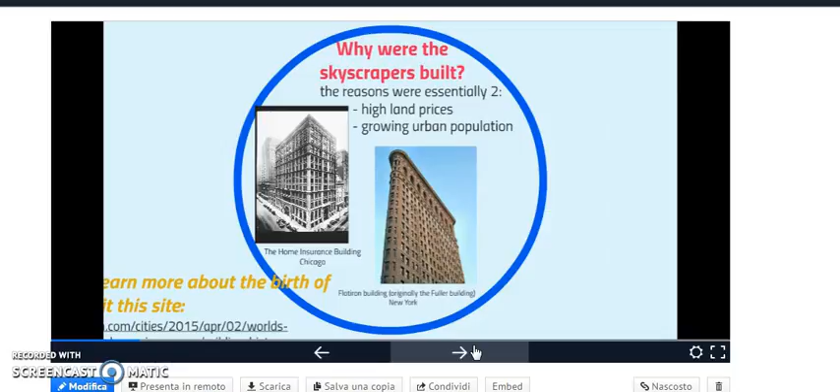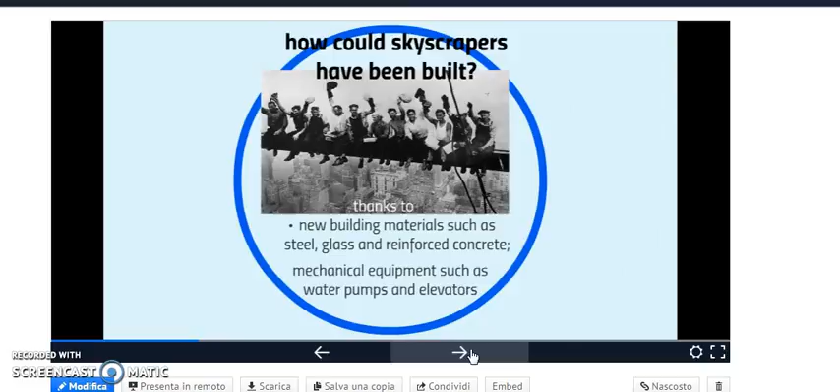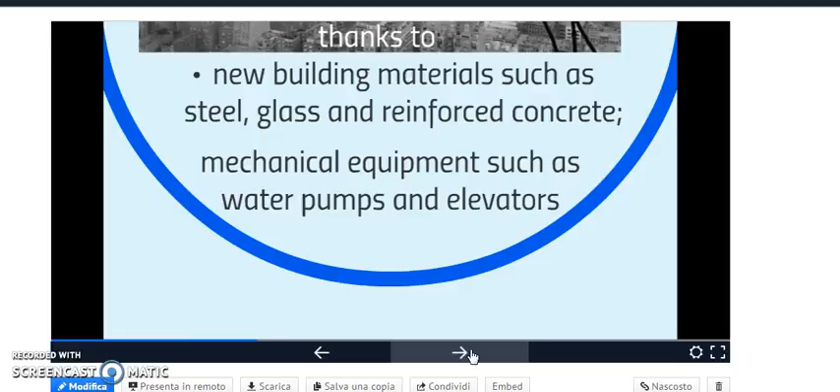Such dramatic constructions had been realized thanks to innovative technology, which involved building materials such as steel, glass, and reinforced concrete, and mechanical equipment such as water pumps and elevators.

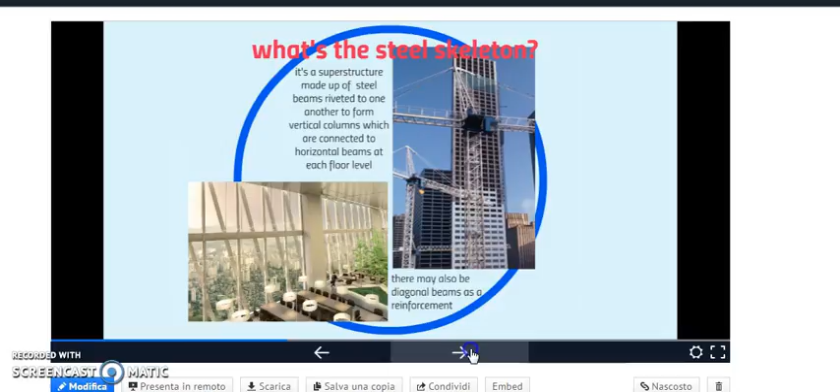Anyway, let's say something about the most important technical feature of a skyscraper, the steel skeleton. It's a superstructure made up of steel beams riveted to one another to form vertical columns, which are connected to horizontal beams at each floor level.

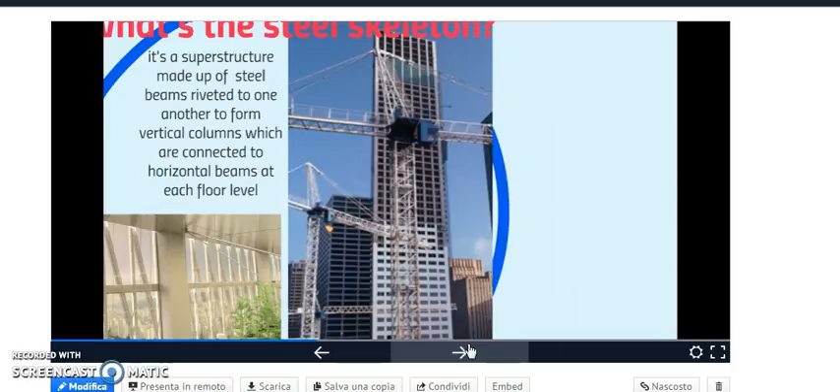The result is the construction of a kind of cage, sometimes reinforced by the use of diagonal beams. It offers the double advantage of supporting huge loads while weighing much less than traditional masonry. Let's go deeper into technical details.

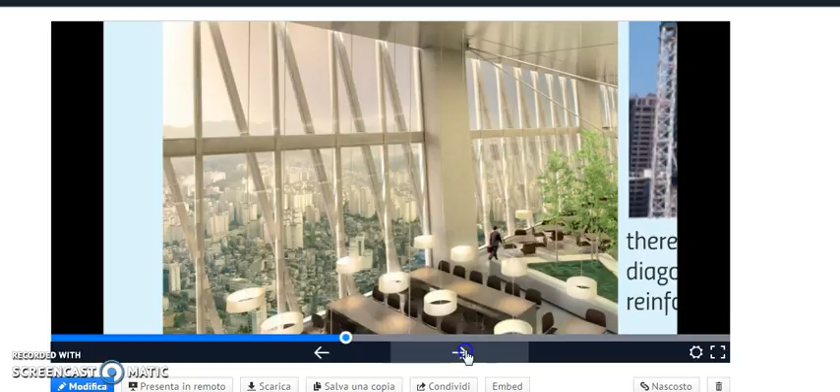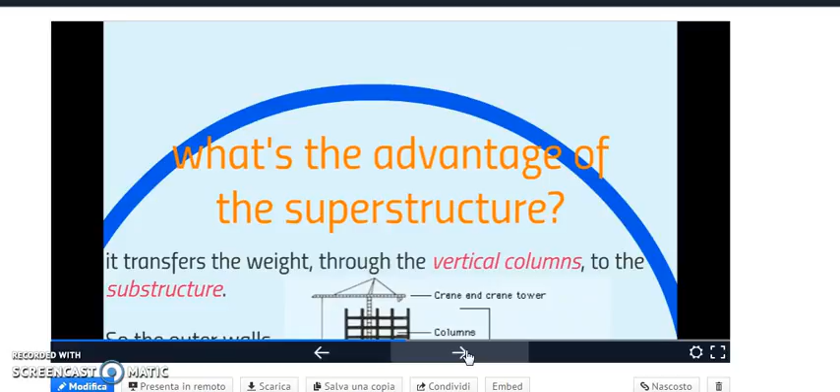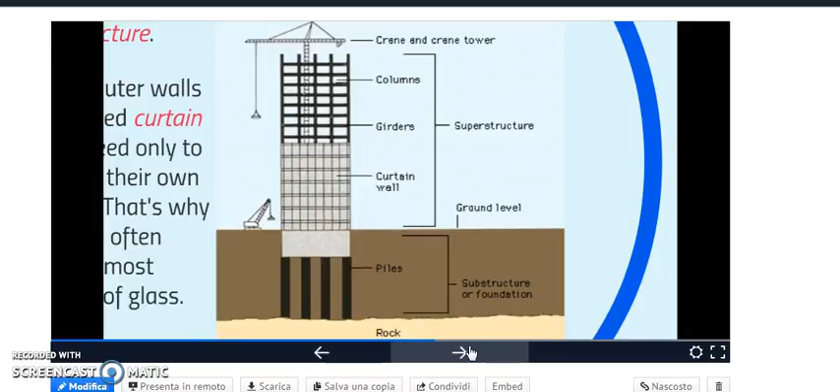What's the advantage of the superstructure? Well, the first advantage is that the weight is transferred to the vertical columns, and it's entirely supported by the substructure. This way, the external walls, also called curtain walls, need only to support their own weight, and that's why they are often made almost entirely of glass.

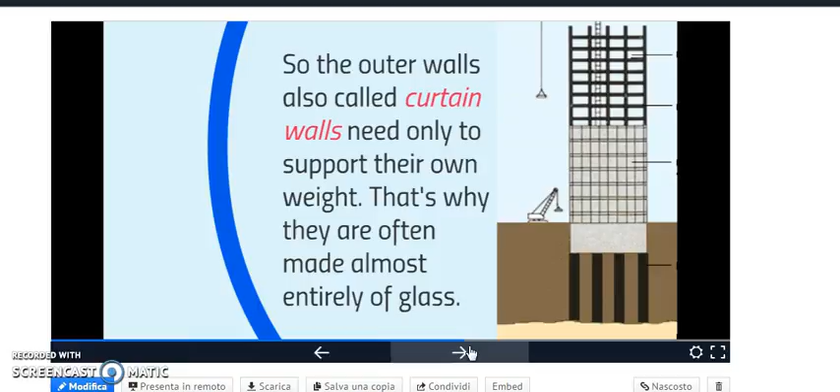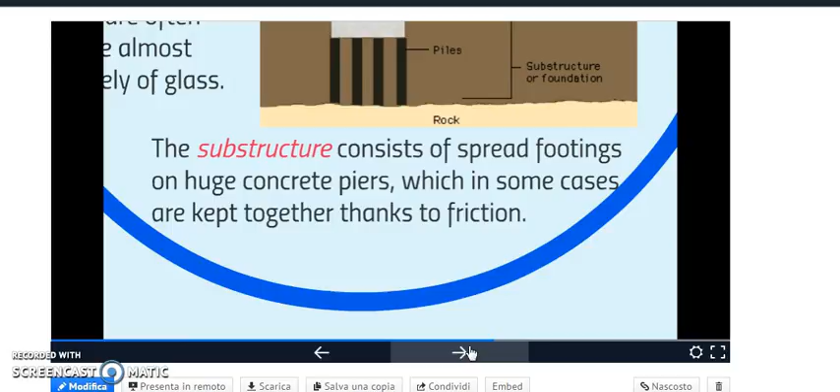Particular care must be given to the width and depth of the substructure, made up of spread footings with the addition of concrete piers or piles, that in some cases are kept together thanks to friction.

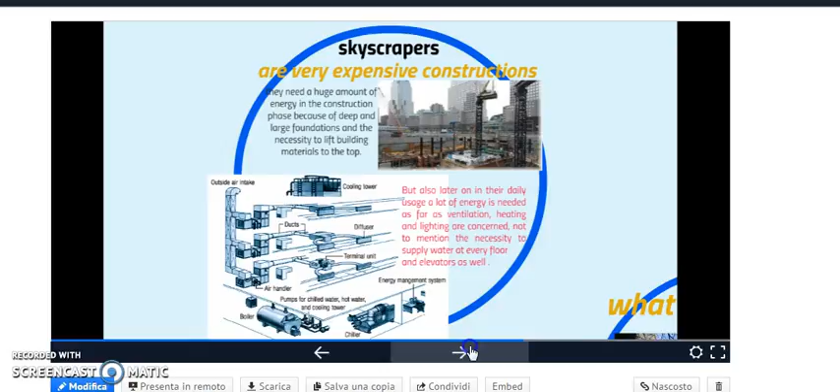Today, skyscrapers are a symbol of power and wealth, but they are extremely expensive constructions. They need a huge amount of energy in the construction phase because of deep and large foundations and the necessity to lift building materials to the top.

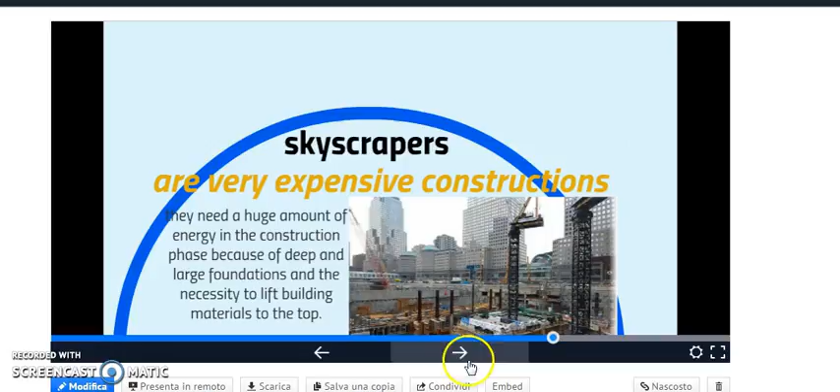But also later on, in their daily usage, a lot of energy is needed as far as ventilation, heating, and lighting are concerned, not to mention the necessity to supply water at every floor level, and elevators as well.

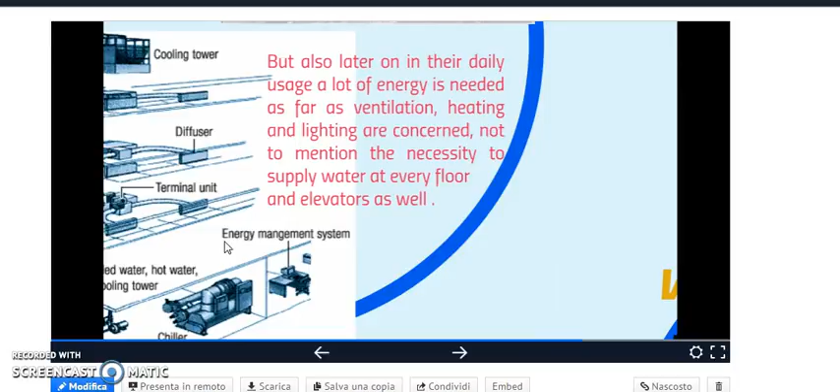What's your favorite skyscraper? Burj Khalifa in Dubai, the Sears Tower in Chicago, the Freedom Tower in New York, the Shard in London, the Chrysler Building in New York.